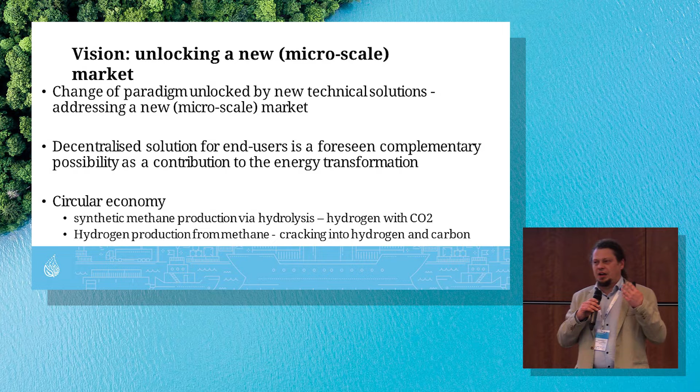Only in, for instance, Nigeria or Tanzania, we are talking about millions of families. And this was more or less a starting point for inventing a solution that could unlock an LNG and bio-LNG market on the nano and micro scale to be able to, inter alia, deliver LNG to such people. And based on this, we have created a vision to unlock a new market that doesn't exist so far.

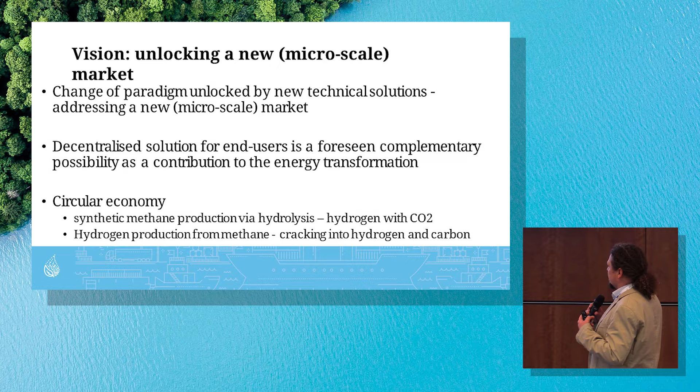But to be able to do this, a change of paradigm is necessary, and this can be unlocked only by technical solutions. A second point, decentralized solutions for end users should be seen as a complementary possibility, as a contribution to the energy transformation and to change the reality.

Last but not least, circular economy plays a more and more important role. And we believe that the wider use of bio-LNG and LNG can lead to or contribute to the transformation of the energy market, energy mix, and also support implementation of circular economy.

To be able to do this, a dedicated logistics system with new tools is needed. And to be able to do this, a new innovative cryogenic bulk was developed. We call it second generation cryogenic bulk, that makes it possible to establish this kind of logistic system, where in the center an LNG production facility or LNG station is used as a central point, and with micro and nanoscale vehicles and bulks, LNG can be distributed to the end users.

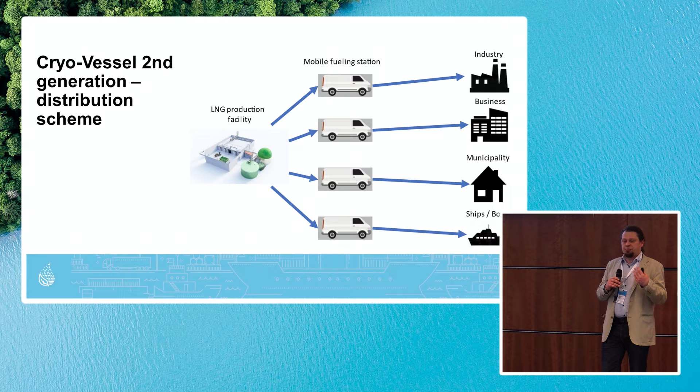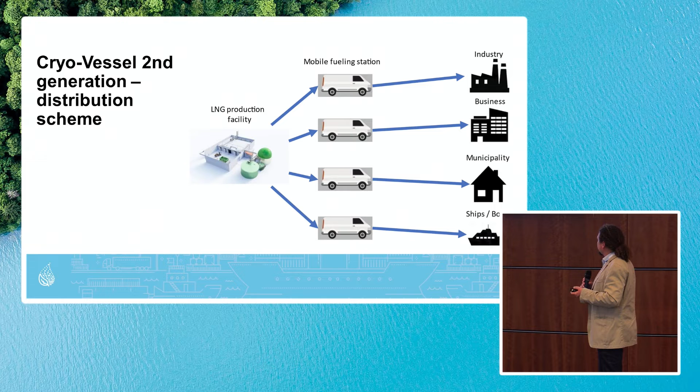Yesterday, we saw the official premiere of our micro mobile LNG refueling station, and this is some kind of core element that can serve as a logistics transport system for this idea.

Solutions on the micro and nano scale are required, which means that so far the companies focus on big scale projects, but if we would like to unlock this micro and nano scale market, then specific products and technologies are necessary.

While developing the cryogenic bulk of the second generation, we started with the idea of who is the person that will deal with this. We call this person Mr. Smith. For instance, this could be an employee of a restaurant or hotel, and this person does not necessarily have an idea about LNG handling, and that's why we defined some corner points of the characteristics of the cryogenic bulk that should be ensured to let this kind of person, Mr. Smith, work with it.

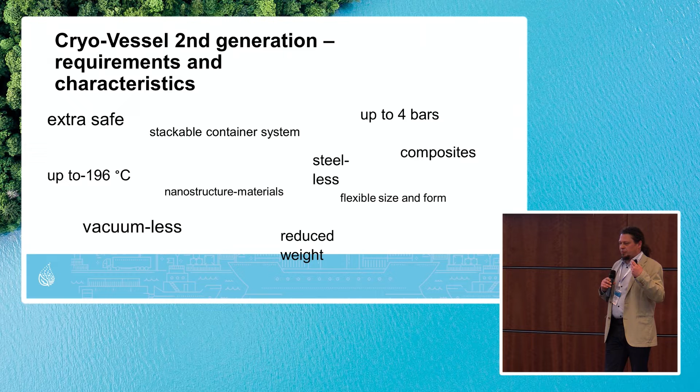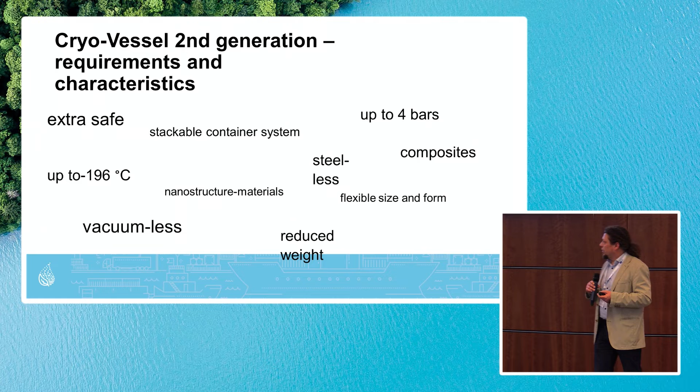Then we said that it must be very easy to handle, which means mobile and light, and that's why we decided that it must be a steelless bulk, which is much lighter. As a consequence of these parameters, the bulk made of different composites and nano materials, with a working pressure of up to 4 bars, was constructed. So this is what we call the second generation cryobulk, the worldwide first solution, developed here in Germany.

This is the technical picture, the form of the bulk. As you see, it looks completely different compared to the traditional steel and vacuum-based bulks. And what is even more important, it's not only light, but it's also flexible in terms of size and form. Why? Because there is no vacuum and there is no steel, which means the materials allow us to create different forms and different sizes.

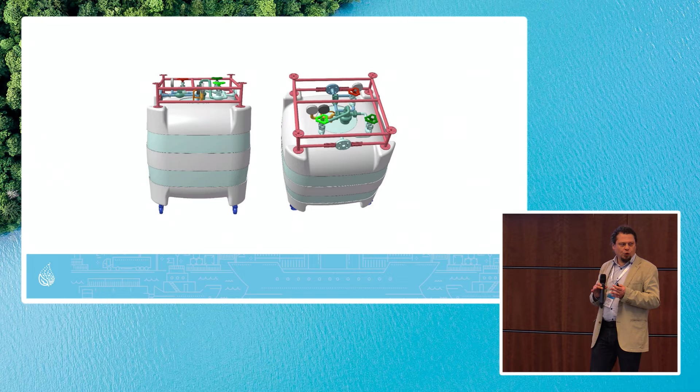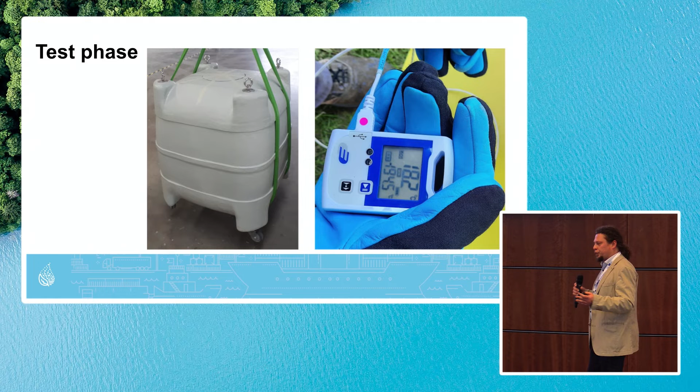And this allows us to reduce the burdens and also reduce the costs of transporting and storing LNG, because we see the potential in optimizing the size dedicated to the specific customer needs. And this allows us to think about a range of different products from the same series.

At the moment, two sizes are foreseen for future production. The small one with 200 liters and about 100 kilograms, and the second one with 450 liters and 220 kilograms. We were talking to potential users, and they said so far that this size, especially 450 liters, 220 kg,

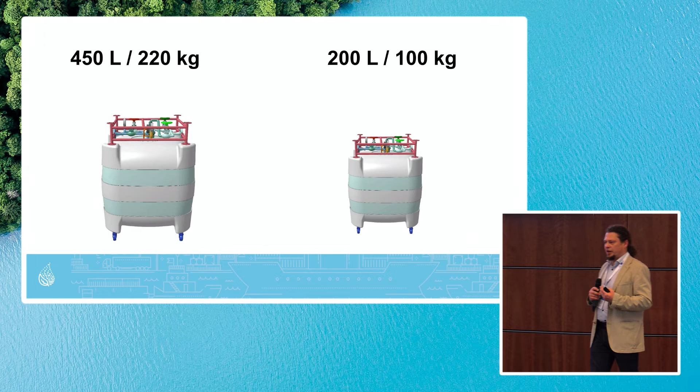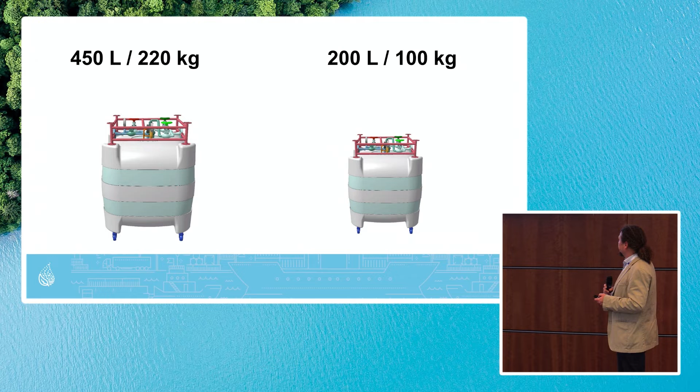is the size that we can, at the same time, load and unload on the 3.5 mobile refueling station. And at the same time, this size is big enough to supply the amount of LNG, for instance, if a truck trailer is out of LNG fuel. With one bulk, this truck can simply continue the journey with an almost full tank.

But we were also thinking in the project about the end side, and we said that with decentralized supply systems, the end user has to be taken into consideration while doing our work. And of course, the customer, the end user, doesn't need a bulk, doesn't need LNG. The end user wants to have energy. And this is a crucial point in the way of thinking. So not only transporting, but also how to use it, how to apply this technology in real life.

Within the Liquid Energy project, we will test two different kinds of decentralized energy supply systems. One is based on older technology, an energy generator, where the input is methane, and methane will be used directly for the production of energy. But the second pilot investment within the project is focused on the same system where, as you see,

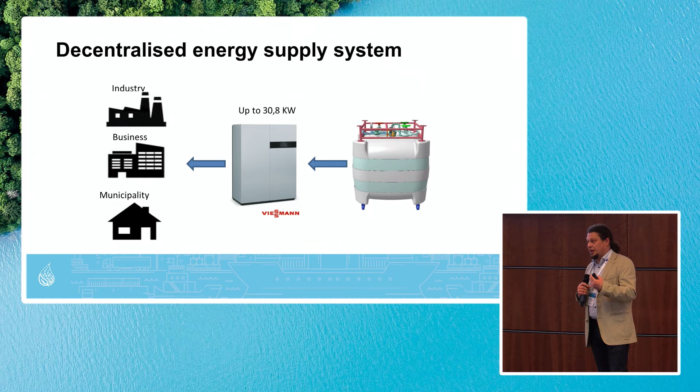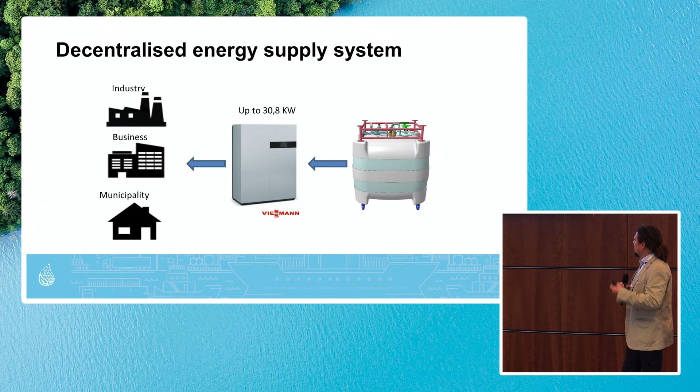the empty bulk will be exchanged for a full bulk and, with a plug-in system, plugged into the fuel cell, which is quite an innovative technological approach. There are different producers that we can test, where the input to the fuel cell is methane. The fuel cell divides methane, CH4, into hydrogen and CO2, collecting the CO2 and using the hydrogen for producing energy.

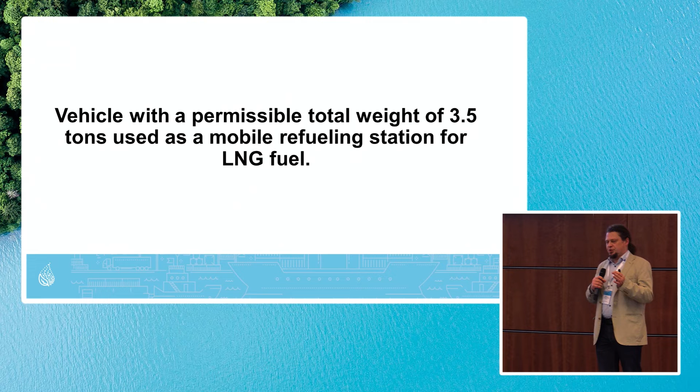Yesterday we saw the premiere of the mobile refueling station, and we see this vehicle as one of the key elements in the system to transport LNG from the central point to the end users. Our ambition in the project was to size it down to a car of 3.5 tons total permissible weight, so that everybody with a B license can drive this vehicle.

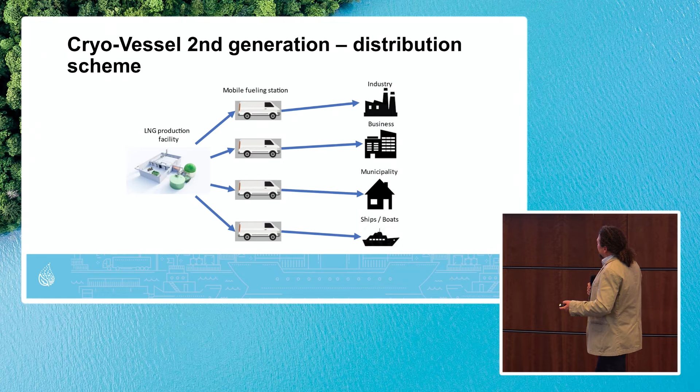So again, if we are talking about this kind of distribution, there is one example: in Milan we met representatives of a company from West Java, Indonesia, where the island is cut off from the grid, and there is no other option than delivering gas in LNG form, which means much more energy, delivering it in small bulks from the central point to the end customers, to hotels, to restaurants.

I spoke to the company two weeks ago again, and they explained that they are using traditional steel and vacuum-based bulks, which are much heavier and much more difficult to handle. That's why they're struggling with loading and unloading those bulks on the truck, and also with delivering them to the end user. So they even had to build dedicated infrastructure to be able to load and unload.

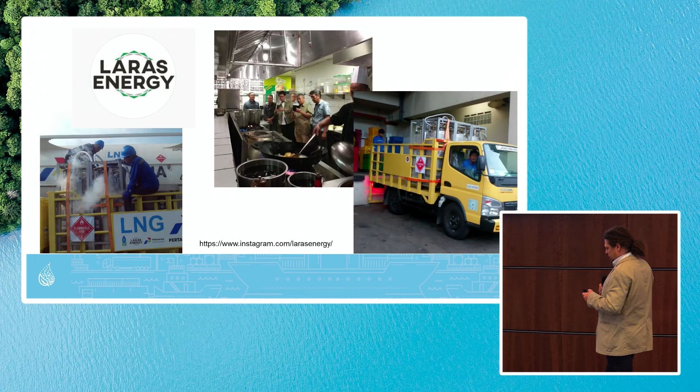And they confirmed that our way of thinking about changing the paradigm and focusing on this market is exactly what they are practicing now. They also confirmed that a more convenient way of transporting, of doing their core business, would be very helpful.

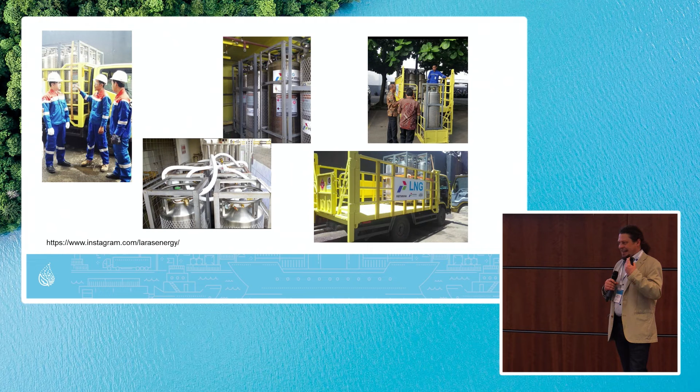Again, this is almost the last slide. You can see how the small bulks, about 100 liters, are transported and loaded on the truck. So this case more or less confirms that our vision within the Liquid Energy project is not only a dream. This could be a real business case that applies in reality.